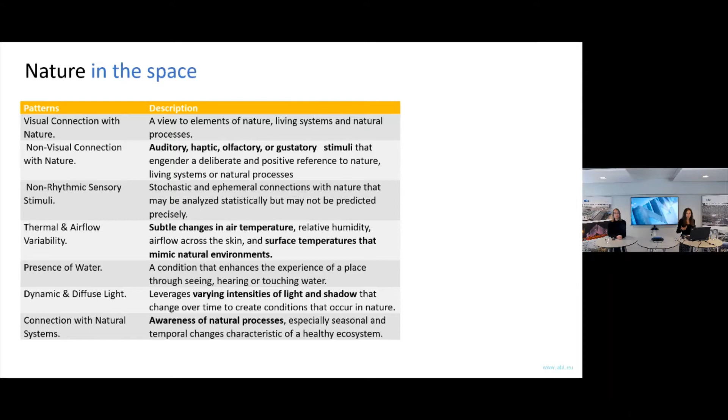Nature in the space patterns relates to the direct connection with nature through the presence of water features, dynamic diffuse light, and sensory stimulus. Some examples here: Singapore Changi Airport, where literally nature has been brought into the space, simulating a tropical forest and waterfall, but also in a more subtle way, the Louvre in Abu Dhabi, where diffuse lighting is created through a complex ceiling. Nature in the space can also be brought through odors and sensorial stimulus via flowers and vegetation.

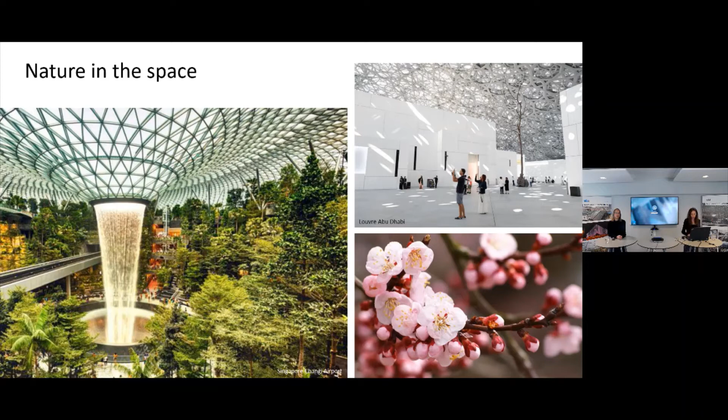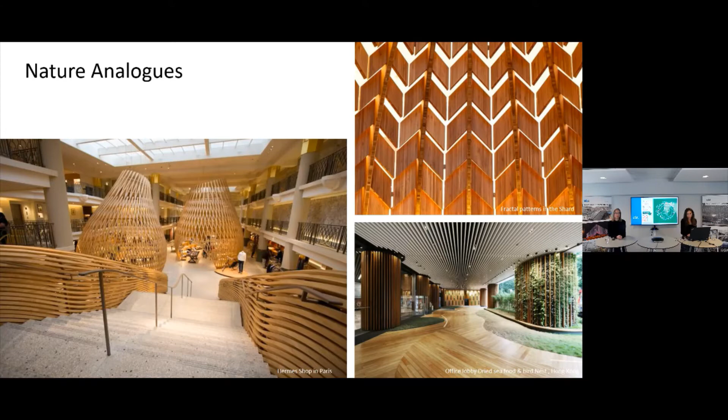Nature analogues relate to the evocation of nature in the space by means of ornamentation, artwork, textiles, and recreating these elements within a complex order, as we find in nature. Examples here: the Hermes shop in Paris, where organic shell-like boxes are recreated with timber elements; and in a more subtle way, fractal patterns, such as in the Shard in the top right picture, where cladding is used to recreate a sort of refuge area into a nap room, as well as within ceiling and flooring through natural elements, like in the bottom right image.

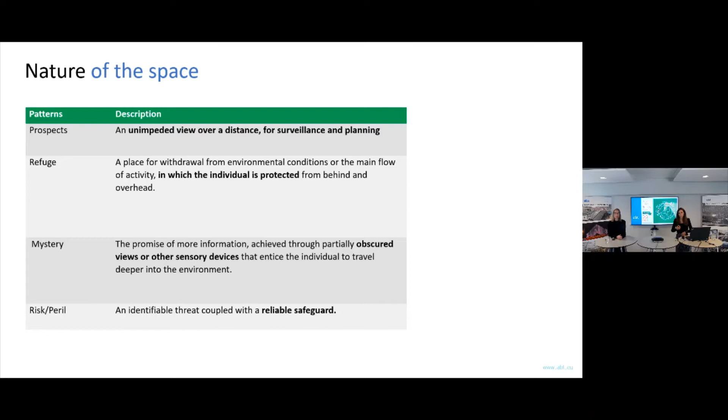Nature of the space patterns relate to a design of deliberate, engaging elements of interest in the space, by looking at concepts such as refuge, mystery, risk, and peril that can be introduced into the space. Like in this example from Álvaro Siza in Portugal, the Faculty of Architecture: on the top left image, the circulation area leads to an unknown space, which is an element of mystery. On the right, an example from the library of the same faculty, where desks are located on the top floor, offering a prospect of view to the library while being protected and shaded by the skylight and the bookshelf, giving a sense of sheltering. Below, an element of risk, which could be a complex staircase, triggering a sense of risk and peril that is relieved once we arrive at the end destination.

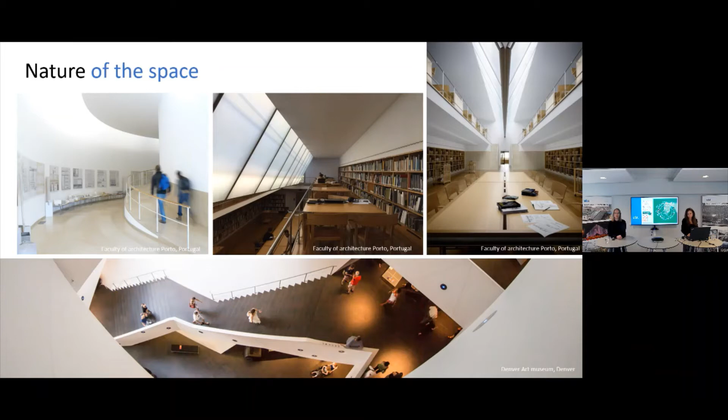The important thing about biophilic patterns is that we can combine them together, and we can also scale them to the environment we want to use them for. So, for instance, they can be used on a room scale, but also on a building scale, or on a campus, or in landscape design.

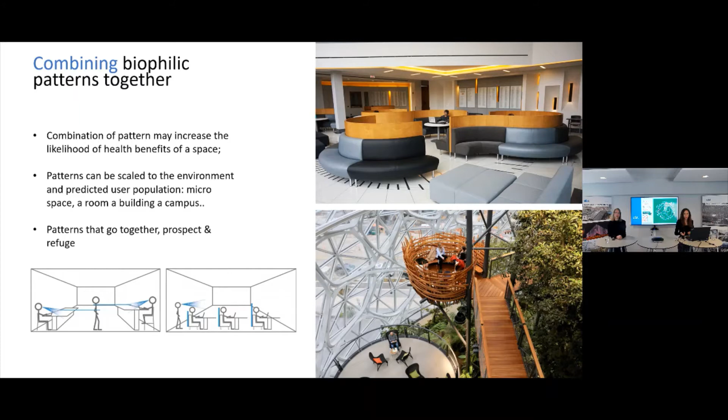This is an example in the schematics on the bottom left, where we enter into an office room, for instance. We always try to look for the seat which is more shaded, protected, more private, but at the same time has a view on the outside space to monitor the situation. This is important: the element of refuge and prospect that can be modulated by a high-backed seat, in order to ensure that when you look for a space, you don't create discomfort by entering too much into the space of the sitting areas.

Several research studies have been conducted in order to address this link between biophilic patterns and health and well-being. This relates to the so-called sick building syndrome, which we often experience in indoor spaces due to, for instance, lack of contact with nature, but also lacking outside views, condensation problems, or respiratory issues.

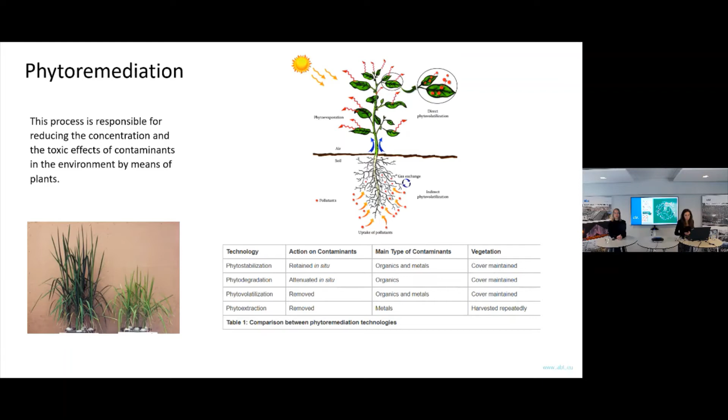Beside that, there are also elements of biological processes that we need to be aware of when designing biophilic strategies. We wanted to show you this simple process of phytoremediation, which is responsible for the reduction of contaminants and toxic elements through air, soil, or water. It relies on the power of the roots of plants, which can store, curb, and break down contaminants. This simple process is at the base of many strategies we see when we integrate nature into the space, the reduction of contaminants.

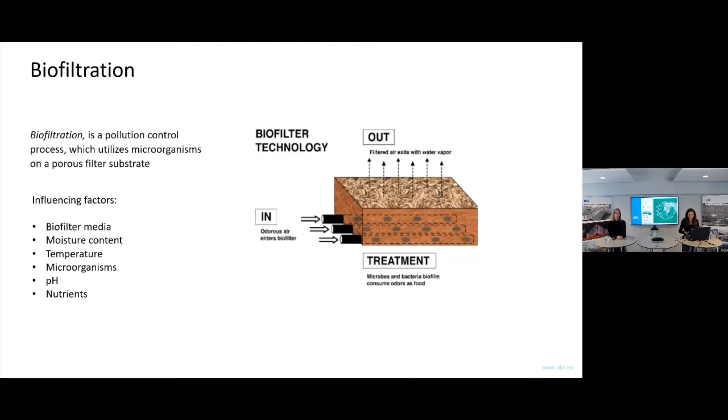We also have biofiltration, a pollution control strategy which merges the power of plant roots with a ventilation system. It needs a surface to be effective, made of compost, soil, or nutrients from plants. This is very effective in mitigating VOC levels, the VOC concentration in a space. VOCs are volatile organic compounds, which we find in furniture, in finishes. They come from printers, and they can be in high concentration, quite toxic for individuals.

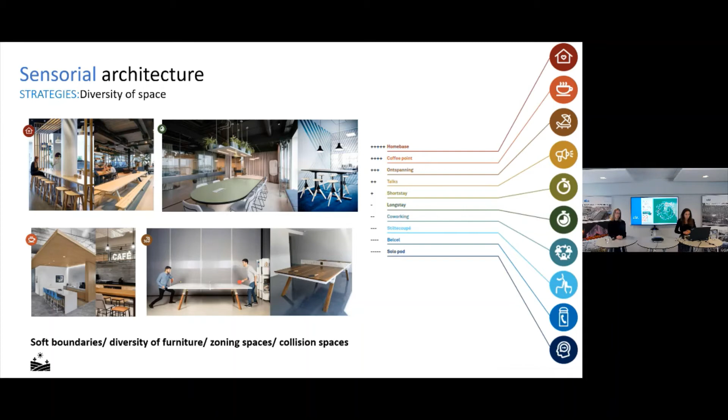Strategies of sensorial architecture: in natural ecosystems, they are more resilient when they have a diversity of spaces and functions. This can be reproduced in the indoor space through soft boundaries, diversity of furniture, creating zones where people can collide, collision spaces where they talk casually or just meet each other, or also spaces with more of a gathering function. This is basically the same pattern that happens in nature, in a different way.

Then we can have non-rhythmic sensory stimuli strategies. This relates more to our capacity to focus, to be alert, and can be enhanced when we position elements of nature on peripheral areas, such as a water feature, plants, or bird stimuli that need to be non-rhythmic.

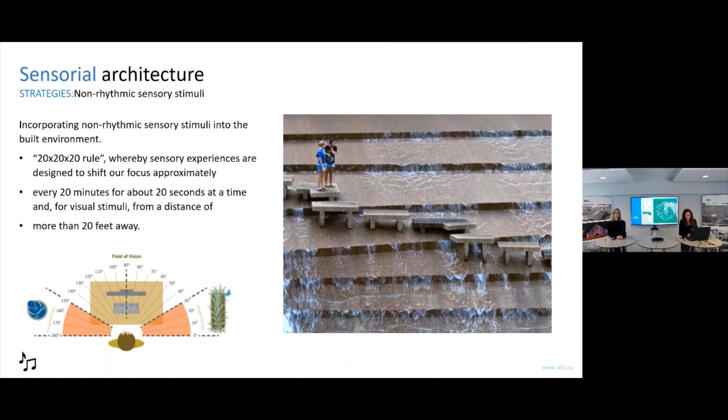So they need to be casual, they need to be natural, organic in a way. And in this sense, we can relax our focus from the task we are doing for a few seconds, and that can have an element of restoration in our task work.

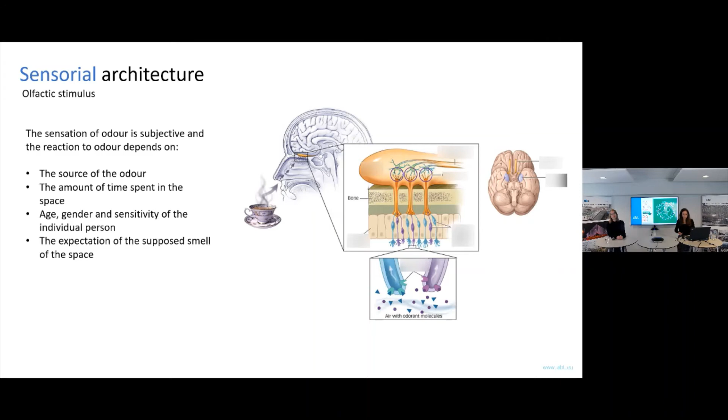But then we have also olfactory stimulus. So the sensation of odor is very subjective, and the odors depend on a range of factors. That depends on age, the sensitivity of the person, the gender, the expectation of having this smell in the space. The odors can be classified from more offensive to less offensive. Some odors, like coffee, brewery, bakery, are not as offensive as waste and gasoline odors and others.

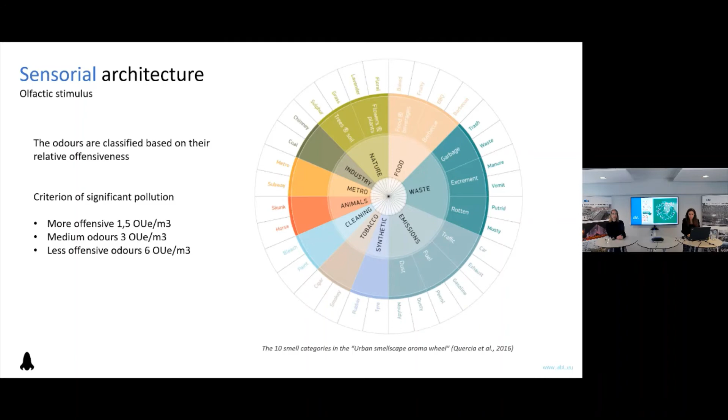So they are really classified and weighted on a scale, and we can actually mitigate or enhance some of these odors in the sensorial architecture strategies. How can we modulate these odors? There the VEBs come in to help, so vegetative environmental buffers. They're divided into two main areas.

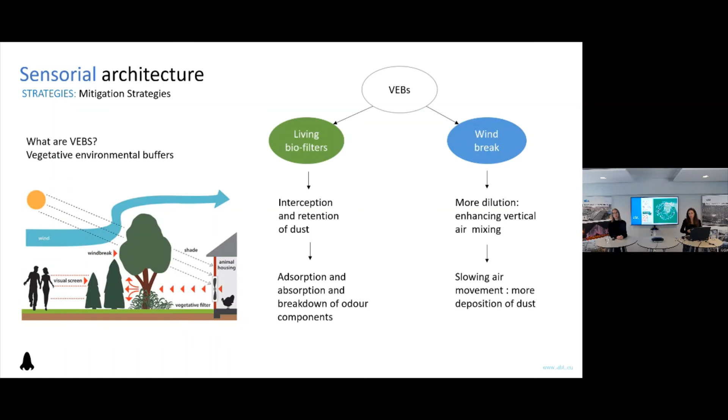So living biofilters, we've seen the process before. So the principle is using the plants to intercept and break down the contaminants. But in this sense, dust is the sort of conductor of odors. So when we break down the dust, when we work on the dust element, we can reduce the element of odor in the space. Another way is windbreak, so by dilution of odors through air ventilation.

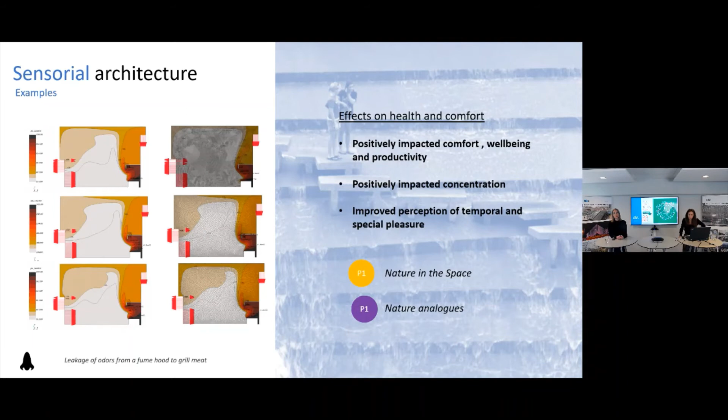We can also simulate it. Here on the left, you can see a simulation of a fume coming from a hood, and we can check the different effectiveness of the strategies we apply through CFD modeling, for instance. Overall, sensorial architecture has effects on health and comfort. We have here listed the main areas of impact: concentration, spatial pleasure of the space, and productivity.

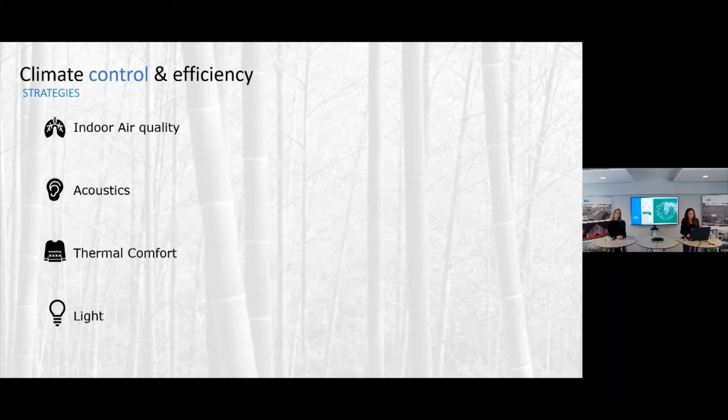Then let's move into climate control and efficiency. So this area covers mainly building physics. Some strategies are active green walls, which are basically a combination of a ventilation system, a recirculating system, with a biofilter. So the air passes through the roots of the plants and it breaks down the VOCs, the compounds in the air. And in this sense, we are reducing the amount of fresh air we need in the space.

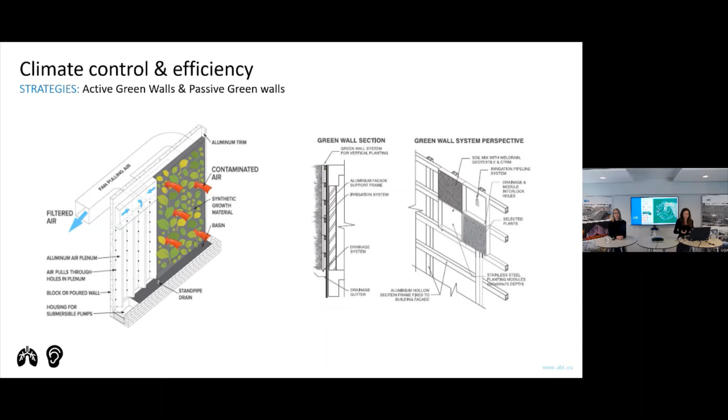We are reducing cost for installation, but also elements of installation, provision of installation in the space. Of course, these systems require an irrigation design for the plants. It needs to be maintained, so it's not so static a system, but it needs some taking care of. Then we have passive wall systems, which basically work as standard acoustic panels.

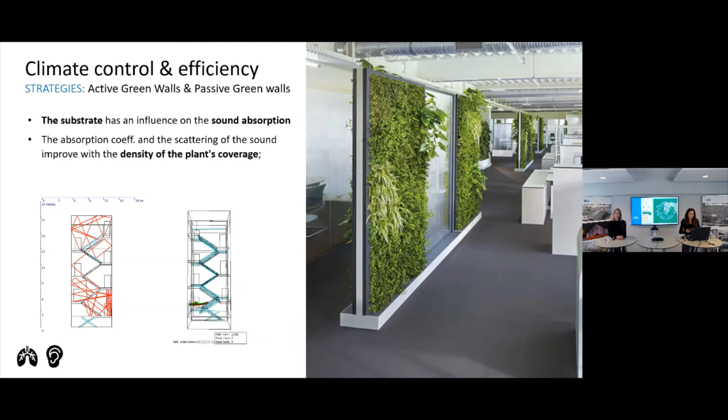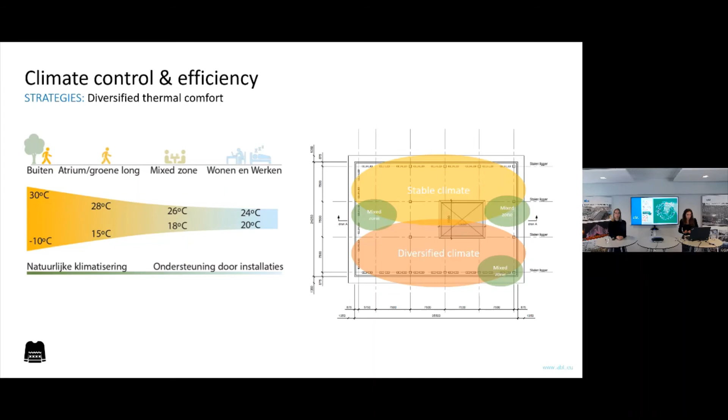Then we move into thermal comfort. So in nature, we have a diversity of climate zones, microclimate, macroclimate, and this can be recreated in the space by allowing certain areas to have a bigger temperature range where people can adapt. They're not feeling discomfort by having this differentiated temperature. But there are areas that require a more stable temperature.

We have here an example of the university building in Utrecht. For instance, the circulation area where people step in is an area where you still have a jacket, you are still coming from the outside. You don't expect to be totally comfortable there. And it's acceptable to have a bigger range of temperature in that space, even a margin of 10, 15 degrees.

Whereas when we come into mixed areas where people are sitting and maybe exchanging some words, or they're spending some time but it's still temporary, then we can have a smaller temperature range set point. And then we have the working seat where we can allow a more stable climate, but also diversify it by zone.

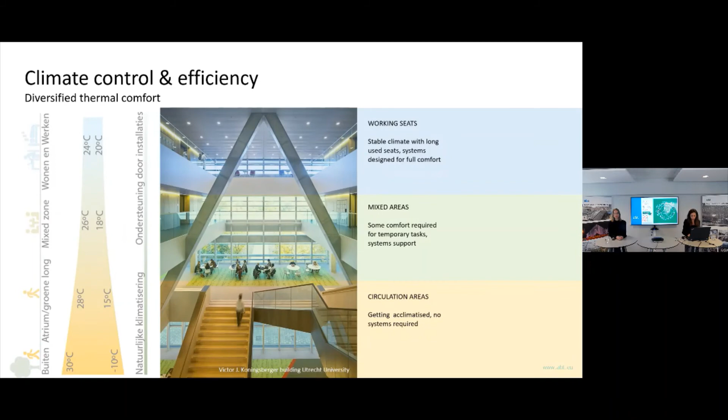So natural light. Throughout history, the effect of natural light on the individual has been quite determinant. Views to the outside in a hospital, for instance, have produced quicker recovery than for people that didn't have this view to the outside, to the natural world. And in office spaces, for instance, being exposed to natural light can enhance creativity and the ability to think logically by 50%.

But what happens when we use artificial lighting is that these patterns of relation to the outdoor climate start to go missing. So in natural light, we have a range of colors according to the wavelengths. It's more yellowish in the morning, bluish during the day, and then in the orange spectrum in the afternoon. We can recreate these sorts of wavelengths through circadian lighting. And in this sense, we can ensure that our body functions much as in the outside world.

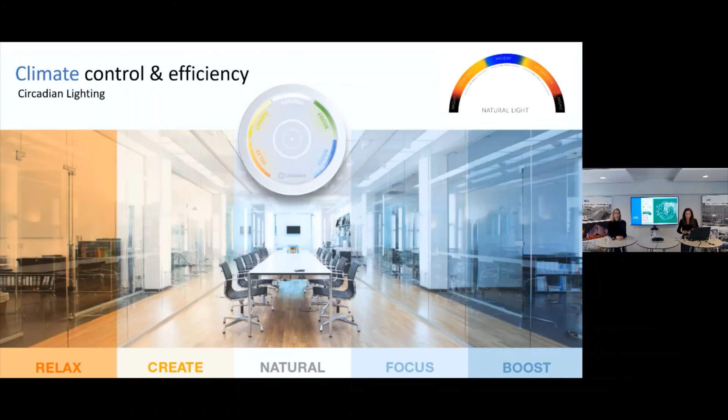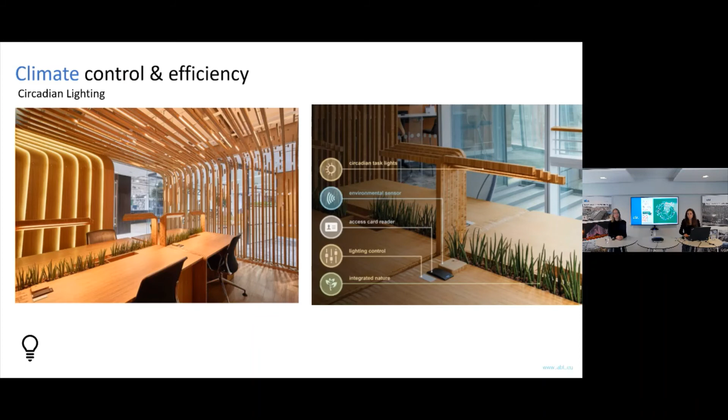So by having more boost, more energy in the morning, and a more relaxed feeling in the afternoon. This can be done through sensoring, smart sensoring, and application of devices on desk level, on wall level, to monitor lighting levels.

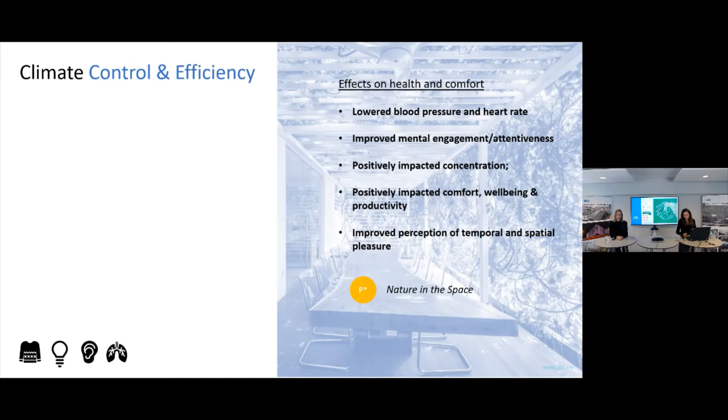So overall, these are the effects on health and well-being as regards climate control and efficiency strategies. Now let's move into circular use of sources. Here we cover more the water use and the edible plants in the space.

Helophyte filters are an example of a phytoremediation process that we've seen initially. They are basins in which reeds and plants are filled in, and they can break down nitrates and phosphorus from the ground. They can really clean the rainwater, and this rainwater can be redirected to be reused for indoor water demands, such as flushing toilets or irrigation or other purposes.

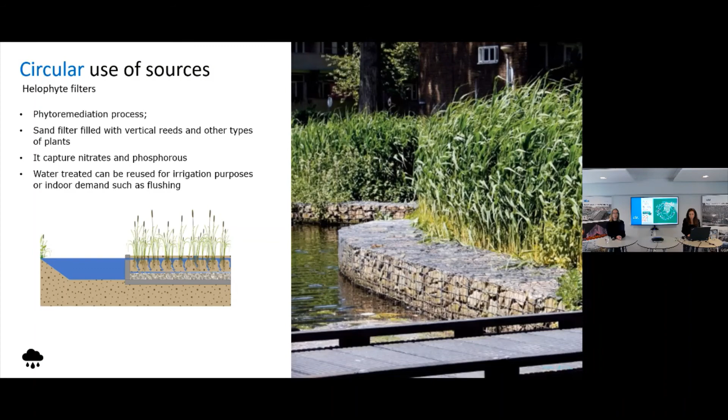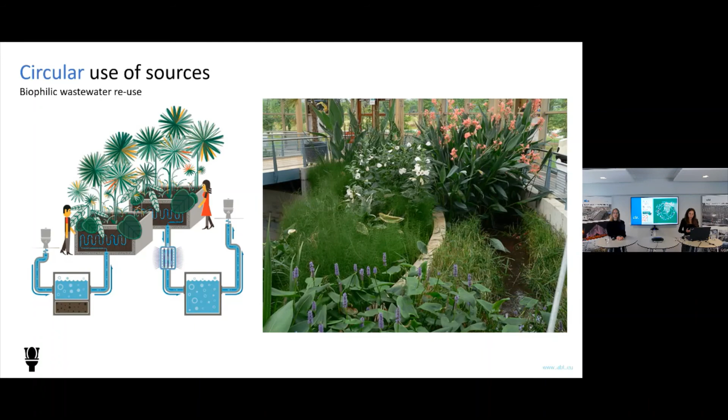A problem of this type of strategy, though, is that it's associated with a high level of humidity, so it's generally more appropriate for outside spaces. Then we have biophilic wastewater reuse. This is an example of a living machine designed by John Todd, American consultancy, and they have this system of basins that basically cleans black water and eliminates the odors of black water. And this water again can be reused for different functions.

And then we have the elements of edible plants. Although this might look like a more, let's say, hipster way of applying vegetation to the space, it's actually the one that has one of the most beneficial effects on health and well-being, because interaction with plants, taking care of them in a more engaging way, has the most benefits in terms of a reduction of blood pressure and stress relief. And this can be applied to organic agriculture, recreational activities which involve the presence of plants.

So overall, the circular use of sources can have an effect on heart rate, blood pressure, and positively impact attitude and comfort. But what happens when we look at the broader spectrum of the certification levels? BREEAM, WELL, and LEED all take into account biophilic design now more than ever. For instance, BREEAM has introduced a credit this year just for biophilic design. WELL takes into account biophilic design in different credits, and LEED has a pilot credit for it. So by implementing biophilic design, we can actually gain more points in these areas and therefore increase the building value.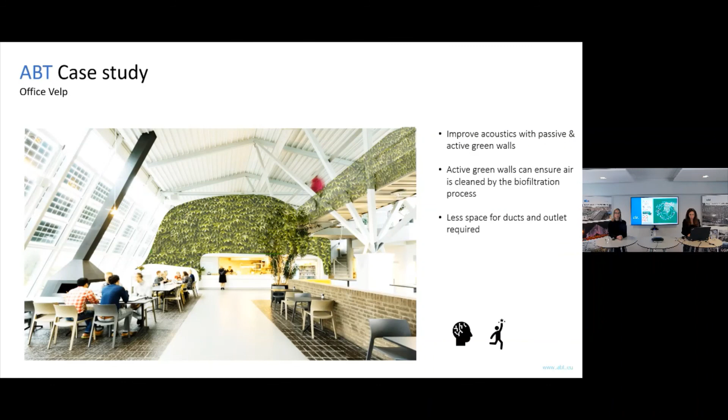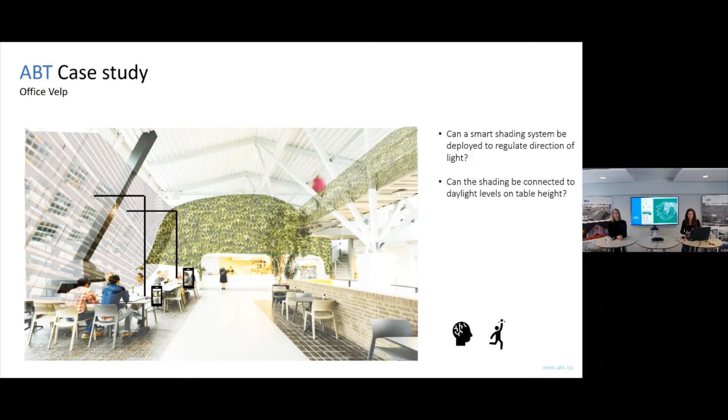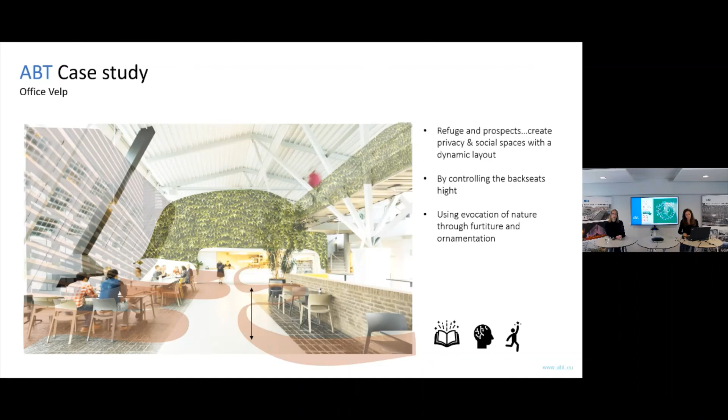What about shading this very bright light through a smart shading system connected to sensors? Maybe we can think of modulating the lighting to avoid discomfort due to contrast and high brightness levels. Can we think of a more organic way of organizing the seating around the canteen? Maybe thinking how we can reproduce the natural world inside, and creating areas which are more private and areas that are more for gatherings, for instance.

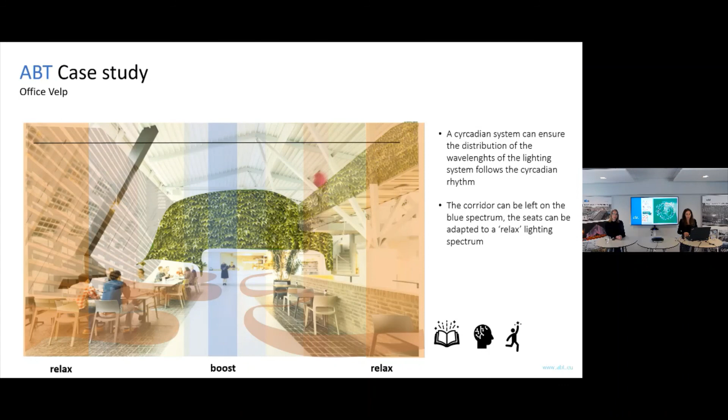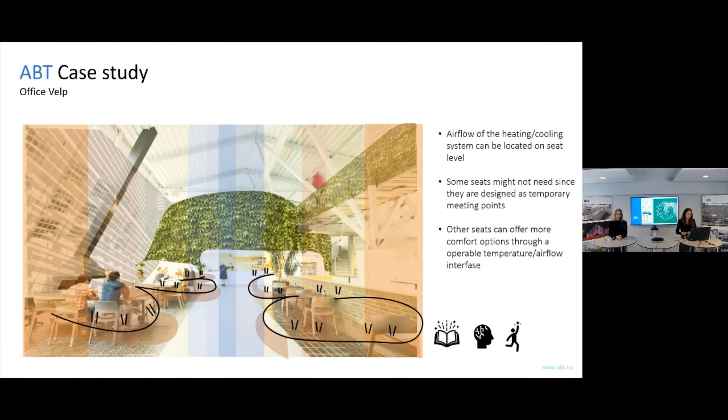But then we can also look at how we use artificial lighting in this space. Can we rely on the circadian system and follow the patterns of the day and the functioning of the body? So we can have areas with more relaxed lighting in the orange, yellowish range, and then boost energizing areas. And finally, can we modulate thermal flow at seat level rather than a set point for the whole canteen? When the canteen is not fully crowded, some seats are off, some seats are on, and at seat level, thermal flow can be modulated according to the person's control.

So finally, what we've seen today is that biophilic patterns can really have a huge impact on our work as engineers and designers. Patterns shouldn't be considered extras, but can be implemented quite smartly into the design of the space to enhance comfort. Maybe we can also introduce some psychological support when talking about targets and goals of design, and discuss more with biologists or agronomists to have their expertise on the type of plants and boundary conditions that work best with certain vegetation types. And in the end, we should really measure the benefits and the cons of biophilic design compared to a more conventional system.